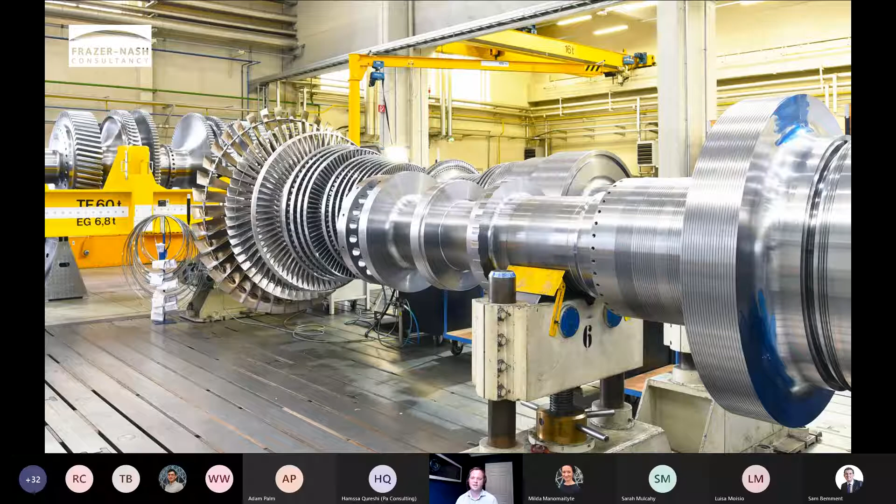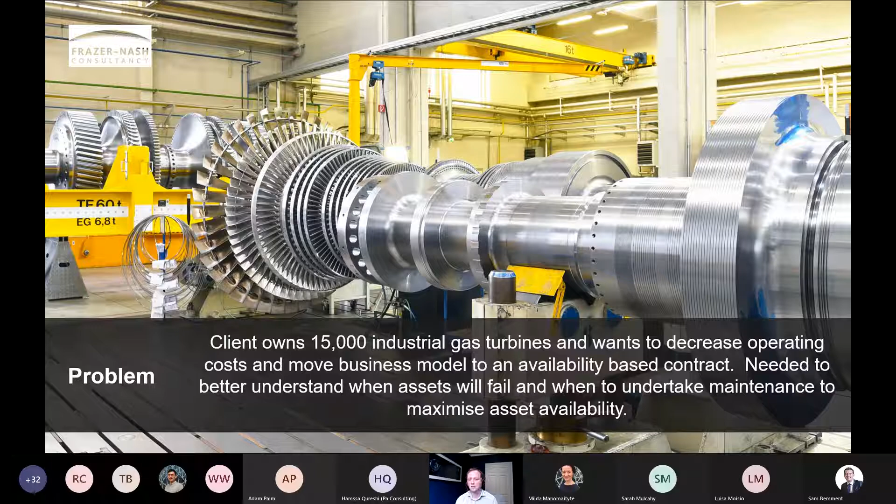And we have a particular client of ours who I'm not going to talk about specifically today due to confidentiality reasons, but they own 15,000 of these units around the world—big, heavy, complex pieces of machinery.

So it's a journey they've been going on for a few years, and Frazer Nash have done various bits and pieces that I'm going to talk to you about today. So where did all this start?

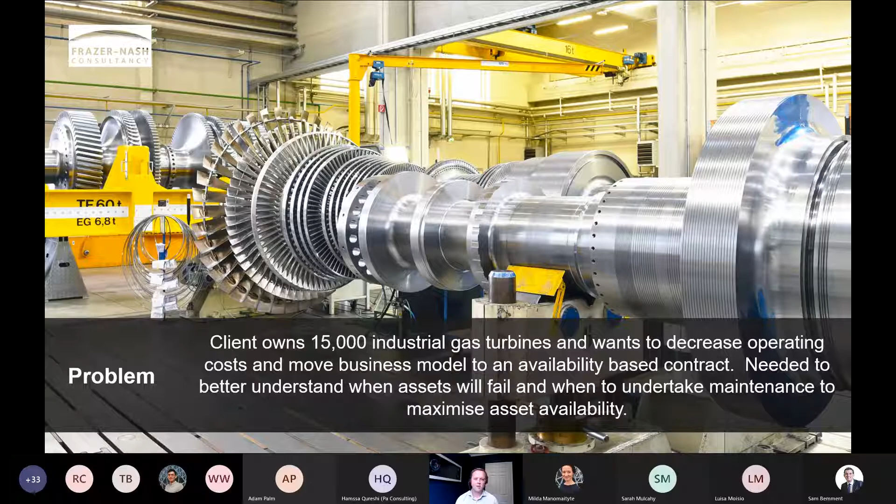So I'm going to talk about, as I just said, this is not about civil aerospace gas turbines. I'm actually going to use that as an example to start with.

When we think about condition-based lifing and condition-based maintenance, if we look at Rolls-Royce as a case study and their power by the hour approach, it's not new stuff - it's been around in industries and sectors for decades. The first power by the hour market approach from Rolls-Royce was way back in 1962, so we're talking 59, 60 years ago, where they took a Viper engine and sold it on an availability basis.

They retransformed their business in about 2002 when they launched the TotalCare package, which was the first time that the kind of data and instrumentation was able to play a really key role in condition-based life estimation and thus condition-based maintenance.

So you look at a modern Rolls-Royce jet engine these days, one of these two big lumps on the wings, and it's got hundreds and thousands of sensors across it.

It's a program they've been on for a number of years, and they've got real-time data being transmitted from all their engines around the world back to a monitoring system centrally, which does some onboard and offboard processing that allows them to have the confidence that they understand what their assets are doing, and thus have great confidence in when they need to be maintained and interventions need to take place.

But regardless of the asset in question, the fundamental approach here starts with the asset. So it could be a railway locomotive, it could be a box wagon being towed behind a freight train, it could be a civil aerospace engine, it could be an industrial gas turbine.

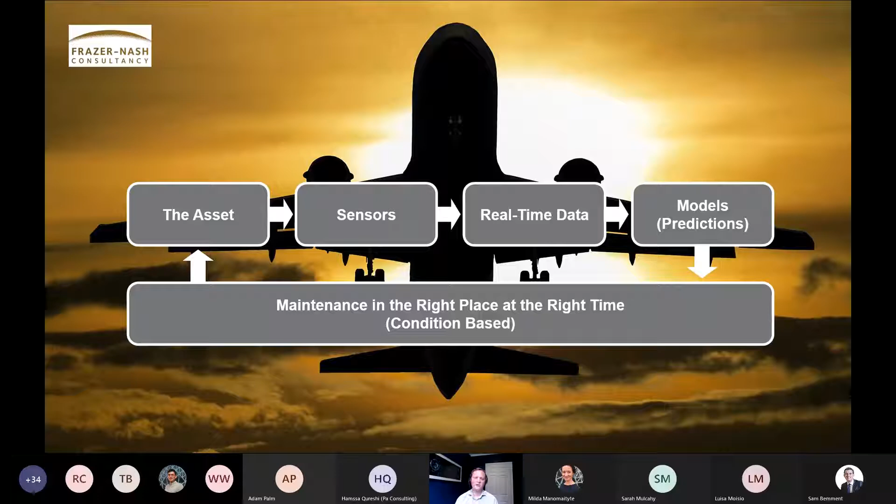All of that stuff doesn't come for free, and this is often the bit that puts people off from that first step on the ladder of condition-based maintenance. You either need some kind of very forward-focused strategic direction board down to make the investments, or you start small and do some sensible stuff.

And hopefully I'm going to explain over the next few slides about how starting small can really benefit people. But fundamentally, you need some information, you need some data, and you need to spend some time doing the engineering understanding of what's going on.

So digitization is key, it's crucial, it's critical, whatever word you want to insert there. Data and information about what an asset is doing is very important. But uncertainty about that data is also an allowable concept - we don't need precise, accurate estimations of everything all the time, and I'm going to cover that in a couple of slides' time.

So we see lots of digitalization. COVID's escalated the kind of digitization journey of quite a few organizations where everyone's been forced into the 21st century. We've got quite a few customers historically who haven't been in that kind of space, but now are, because the hand has been forced.

When we think about assets and data for digitization, there's two schools of thought. The first one, and probably the most common, is the big data approach. This is putting instrumentation on lots and lots of things, having lots of instruments recording lots of things all at once, getting readout of GPS location 20 times a second and storing that.

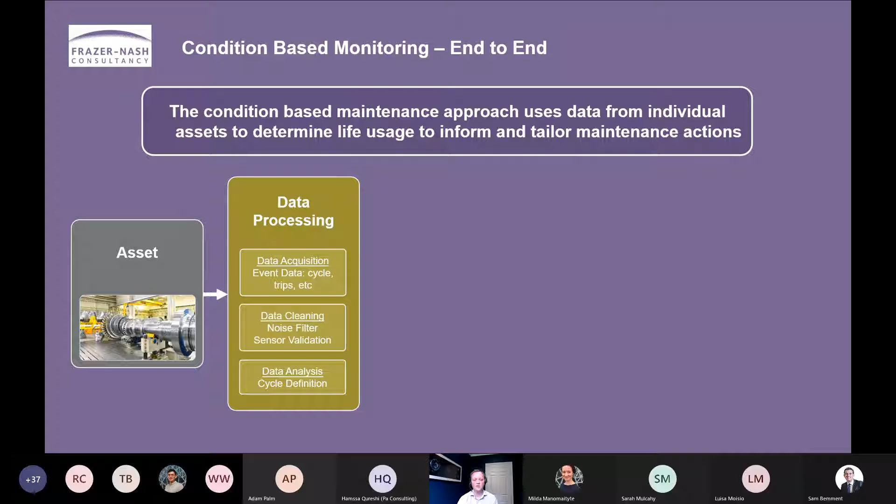And then we need to analyze that data, chop it up into the bits that we want to feed into our predictive life models. So we've got some data processing stuff going on.

In the case of a gas turbine, the bits that really cause us pain are that these things operate at internal temperatures of thousands of degrees. Very, very significant creep and fatigue problems occur in a very complex piece of engineering design. But fundamentally, we need to be able to model that in a way that we can take our data in real time and feed it into our reduced order models.

So our models of component stress and temperatures - what's going on within this particular example - we need to figure out what those models look like and build them. Once we've built those models, we can use them as the predictive engine to give us our life estimations. So this is where we've done complex models, simplified them, validated them using operational data, and we're now in the world of doing real-time estimates of life.

As I said before, the key failure mechanisms in this particular example are creep and fatigue, and indeed creep fatigue is a slightly different effect. But we have built the models to do the life prediction.

Every time someone changes what they're doing with their asset on the left-hand side - so they may be using it a bit harder, ramping up because there's a particular need for energy in this part of the world today - so we've ramped up how much we're using our gas turbine. That gets fed through the data into the models, into the life assessments, and in real time, as an owner of this particular asset who is now leasing it on an availability basis, we get the information we need to take action in the most appropriate way.

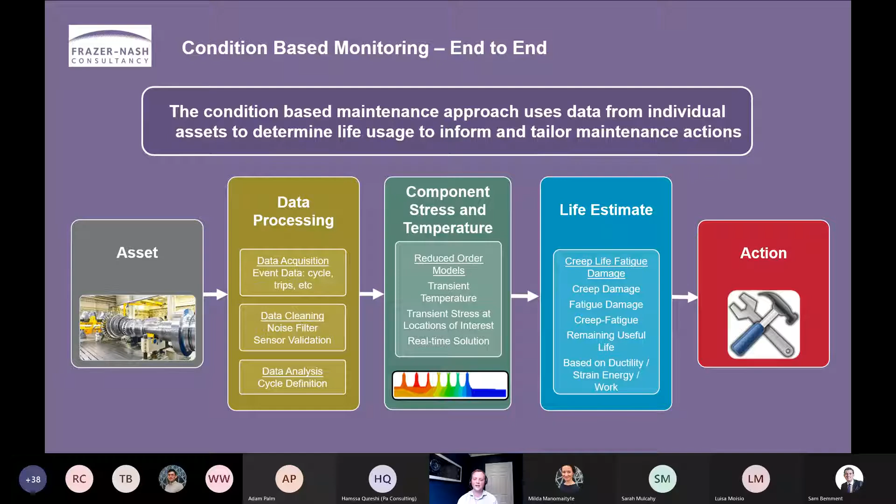So why are we going to do it? Why are we doing this stuff? Well, fundamentally, it's about damage. What we're talking about with condition-based maintenance, condition-based lifing, is we're causing detrimental effect to an asset, whatever it might be - gas turbine, railway carriages, etc. But what are we causing that damage relative to? Well, traditional maintenance cycles are based on number of hours, number of years, whatever it might be, between maintenance periods.

The way we get to those periods of, let's say, 20,000 hours of operation is that we look at what it was designed to do, we look at how that design point is likely to be seen in service, and we make a plan to maintain it around that. But it's conservative. It has to be conservative by its nature.

What we do when we're looking at actual usage is you start to see things are less damaging. Nobody's really using an asset as hard and as fast and as long as they are designed to be used. And that presents an opportunity for us to do more with our maintenance windows.

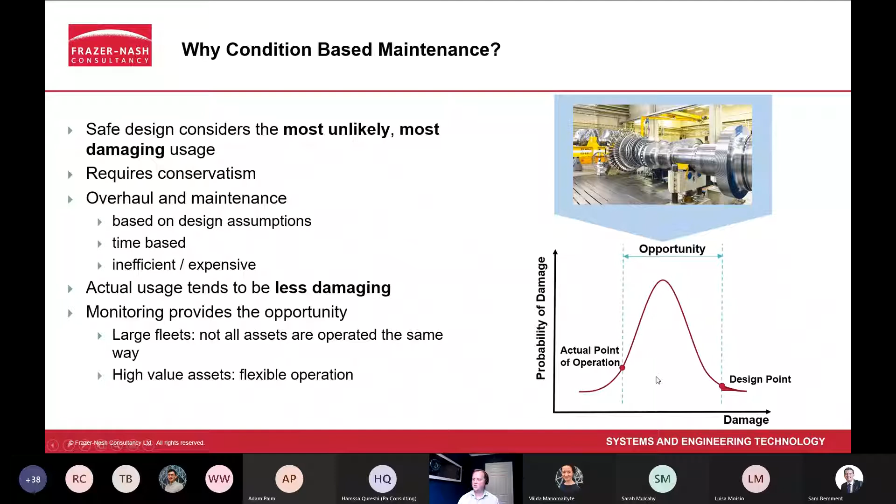It gives us an opportunity with uncertainty to understand what we need to do to that asset to maximize its usage. Condition-based maintenance and lifing is about quantitatively finding out what that opportunity looks like, how big is that bound we see there on the graph, and crucially, using the predictive lifing models, exactly what we need to do now to make sure that we never tip ourselves over the damage point where we're going to be causing significant damage and things fail. That for me is what CBM is all about.

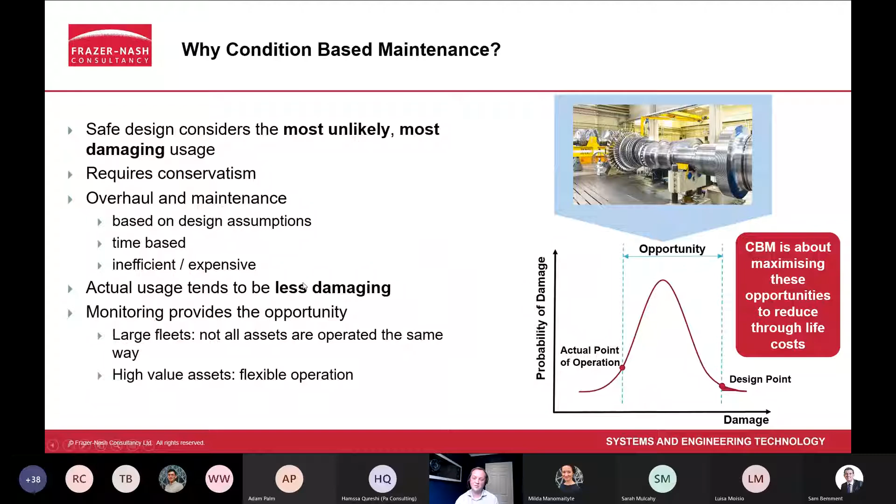And that's where the opportunity lies. It's about using and understanding lifing of, in this particular case, the hot gas path through the middle of an industrial gas turbine, to allow us to exploit the maintenance windows to best effect.

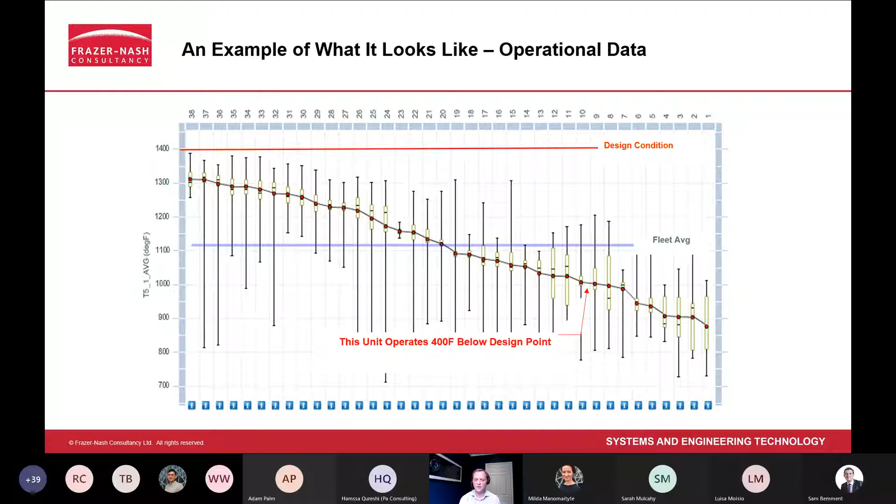The customer is nameless here, but they've got sensor data being recorded every hour and being sent back. It's feeding into real-time damage models so that they get the ability, in a dashboard view for all of their assets, to be able to see when they need to maintain things, and crucially, when things change, what they then need to do about it.

What are the benefits? Reduced cost of maintenance. For them, their spare holdings have reduced by 70%, and that is massive when you think about the number of units they're responsible for globally. They know when things are going to fail, they can predict when things are going to fail, and they can intervene before that point. So why have warehouses full of spare parts? You don't need to do it.

Cost savings here measured in the tens of millions of pounds, because you haven't got as many spares and you're not doing as much reactive maintenance, and fundamentally you're doing less maintenance, full stop.

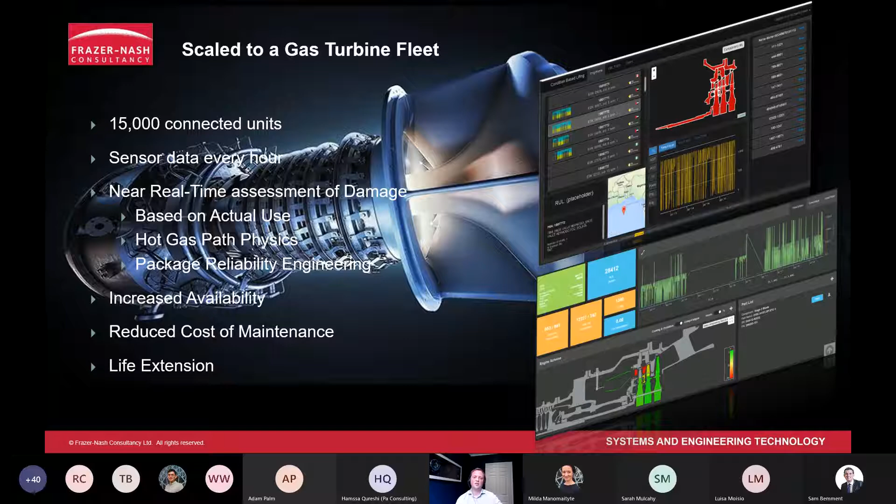And that's the kind of end result. They've been on this journey, they've invested in the process, and they understand the damage mechanisms. So that's all I want to share with you today.

Roughly just shy of 20 minutes there, I think. Quite happy to take any questions. I'll be around in the Q&A later, but if anyone's got any questions that we want to go into now, I'm not sure how much time we've got, Milda, but more than happy.

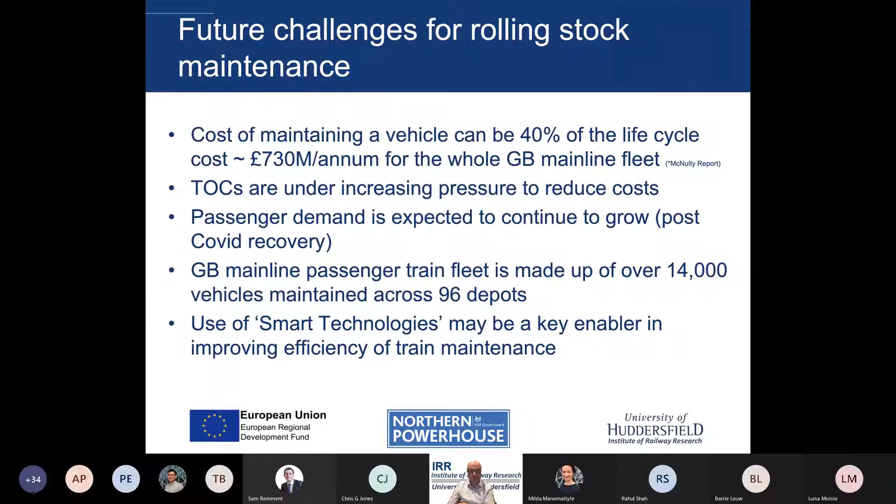The rail technical strategy and the key train requirements did identify the future requirements and focused on easy to maintain, and also safe and rapid inspection and repair. There's an increased emphasis on the use of RCM, also robotics and AI, including the better use of this - so infrastructure-based RCM, onboard RCM, such as intelligent diagnostic systems, but then intelligent analytical tools. So this is about taking the data and actually doing something with it.

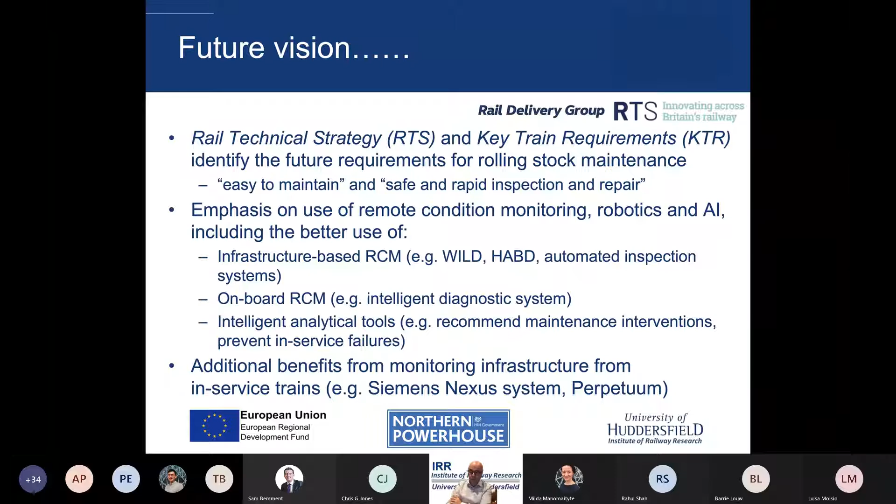And additional benefits from actually monitoring infrastructure on trains - something like the Siemens Nexus system, and a great example of an SME, Perpetuum, and the systems that they do. So picking up on the rail technical strategy, and honestly, Luisa and I's presentation wasn't produced by the same person at the same time, but we both got red squares and rectangles.

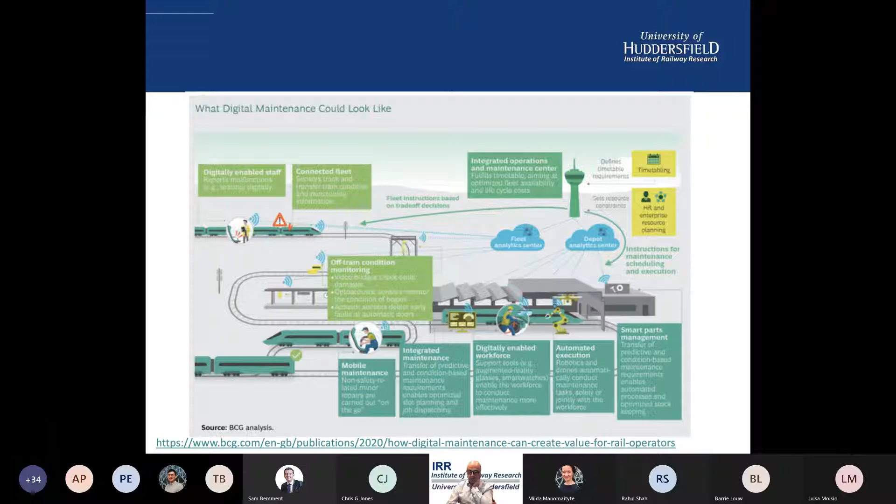Taking all that into account, I haven't really got time to talk through this slide in detail, but that's really a practical illustration of how we can take all of this data. That data can be analysed at both a fleet level and a depot level, and then actually deployed through things such as digitally enabled workforce, automated execution with robotics.

So we take all that into account and arrive at the Smart Rolling Stock Maintenance Research Facility based up at Huddersfield. It's a £1.8 million project to establish the facility, 50% funded from ERDF and 50% match funded. A 3-year project.

We are 9-10 months into it. The aim is to improve the efficiency and effectiveness of rolling stock maintenance to meet future challenges, and the facilities will include, as of September of this year, when all the construction and setup is complete, maintenance optimization and test facilities, a virtual depot digital twin setup, facilities to process RCM data and develop that data, and an augmented reality suite.

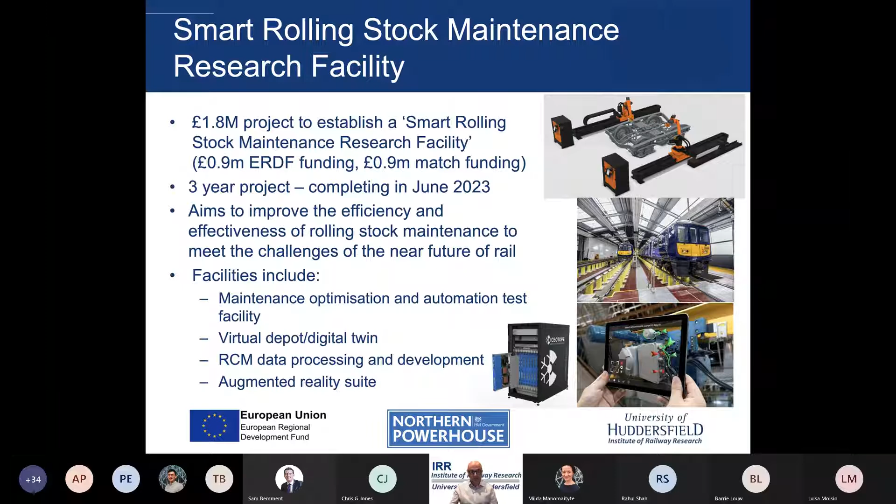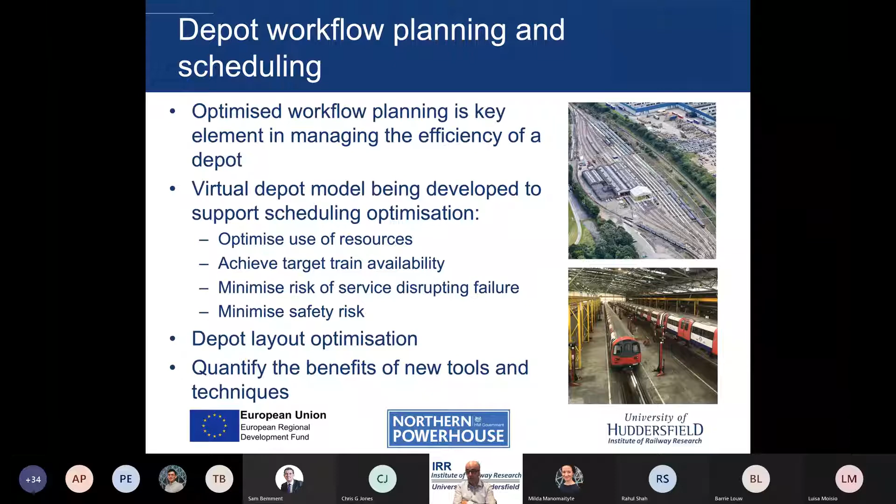So in terms of breaking that down into work streams, in terms of depot workflow planning and scheduling, with a view to that becoming virtual depot and a digital twin, we're going to be focusing on optimizing that workflow planning, because we see that as a key element in managing the efficiency of a depot - developing a virtual depot model to support that, looking at the optimal use of resources, helping to achieve train availability, minimizing service disruption, and of course not forgetting minimizing safety risk to the actual employees that work within a depot, looking at layout, and then also being able to quantify the benefits of new tools, new techniques, new machines, new equipment within a depot.

That is part of the model that we've started to prepare. You need to speak to somebody far cleverer than me to explain that in detail, but it's taking individual component level information and how that can then begin to feed through into condition-based monitoring, but also into how that fits into the depot activity and scheduling.

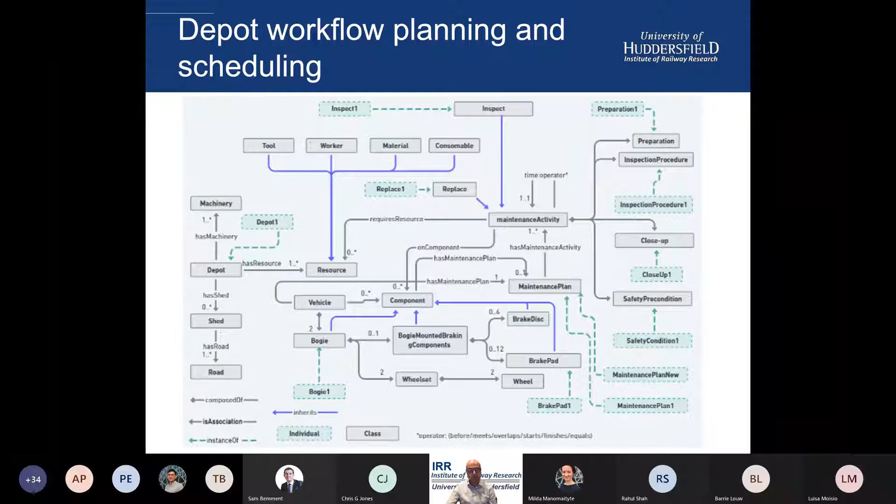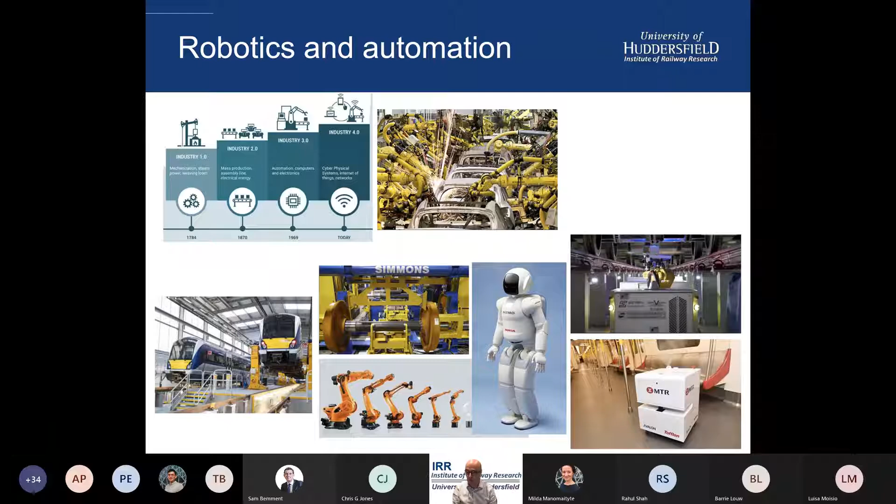Robotics and automation, very prevalent in a lot of industries, very much now part of Industry 4.0. We can see it in automotive, and we certainly see it becoming something that should be accepted and available in rail. There are a couple of images on the far right of actual robots in use, both under car inspection and in-car inspection.

Some of the tasks we're looking at for suitability for automation: inspection using image recognition, surface shape scanning, ultrasonics, torque checks on bolts, axle inspection, oil sampling. In terms of servicing: fueling, sanding, toilet emptying and water, cleaning, as demonstrated by that image earlier of the robot, also front end and under frame cleaning, and the replacement of parts using robots and automation, whether that be brake pads, filters, missing bolts, bearings, pantograph items.

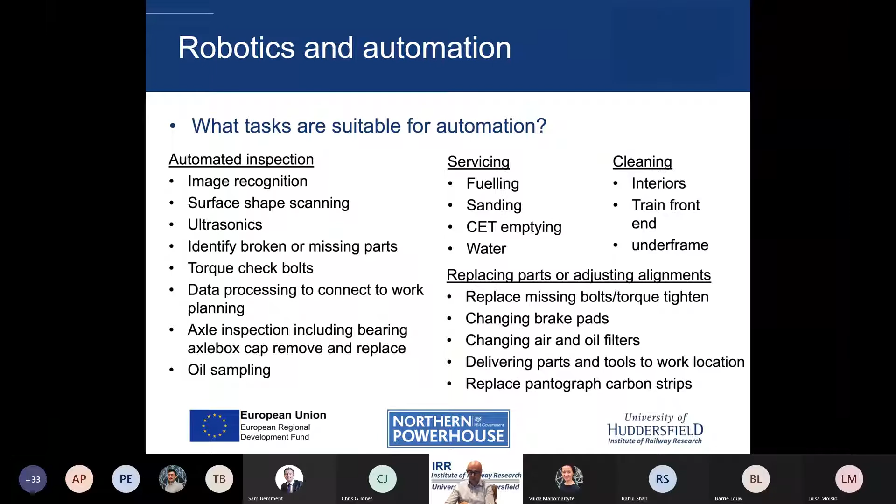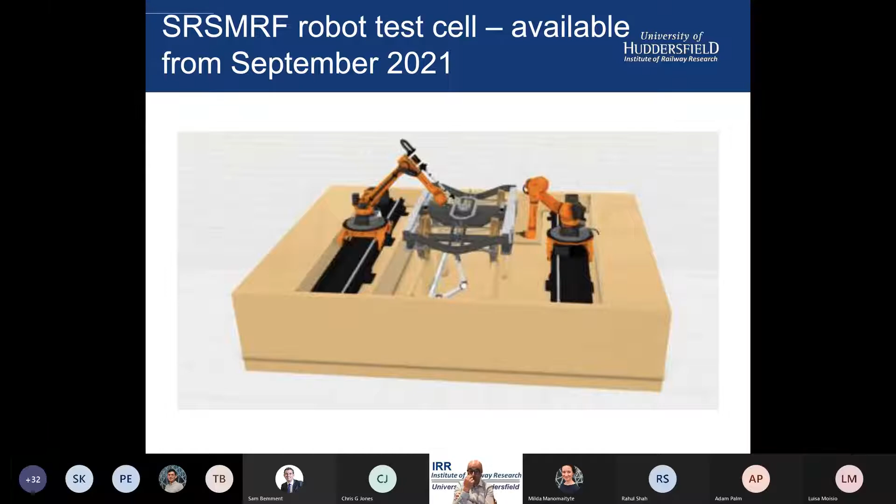What we're developing, which will be available from September of this year in the laboratories up at Huddersfield, is a small-scale rail maintenance pit, which will have two large KUKA robots either side. Apologies for the quality of this image. We'll also be able to replicate working on the roof by putting a cover over the top of the pit, and the robots can then work at roof height. You can see some smaller white robots in the midst in the middle, working on under chassis and component level stuff. At the moment, it's a big hole in the ground as construction continues.

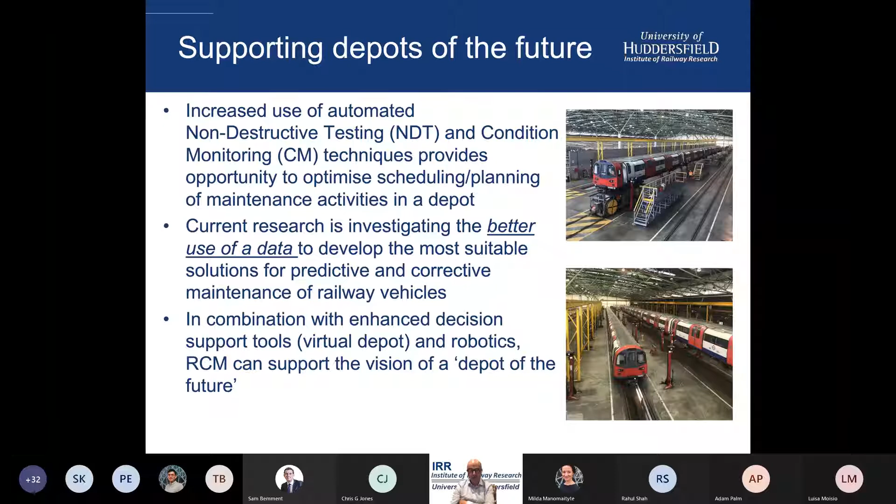Focusing a bit more on the data aspect, which from a prognostic point of view is the conversion of information into a digital form which can support future decisions. It's a key enabler. Previous research shows that RCM could provide up to 30% reduction in train delays, but there's a need for improvement in the effectiveness of the algorithms, which we are now working on, and also more sophisticated analysis.

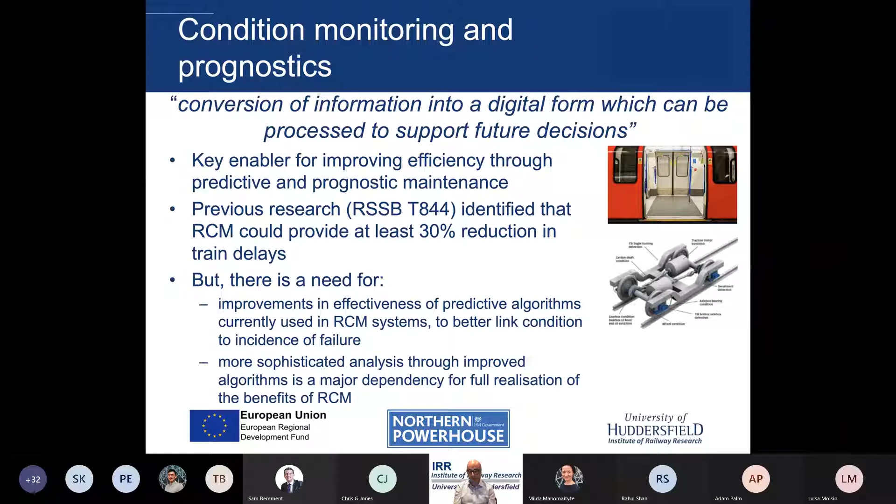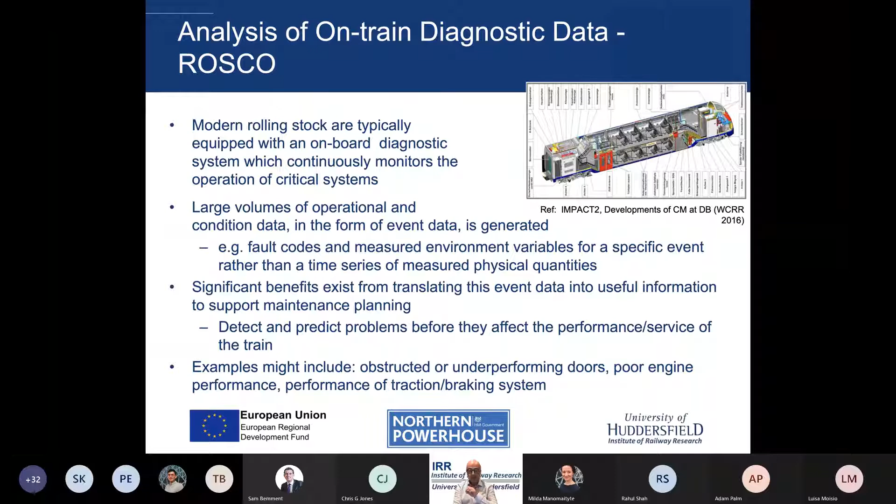So an example case study - this is a live project we're actually working on with a ROSCO, I'm not allowed to say who it is. The rolling stock we're analysing is equipped with onboard diagnostics that are constantly monitoring performance and outputting data - large volumes of operational and condition data, fault codes, environmental variables, etc. What we're drawing on is translating that data into useful information to support maintenance. So instead of it being 'this is what's happened', we're trying to detect and predict what that leads to in terms of a fault analysis process.

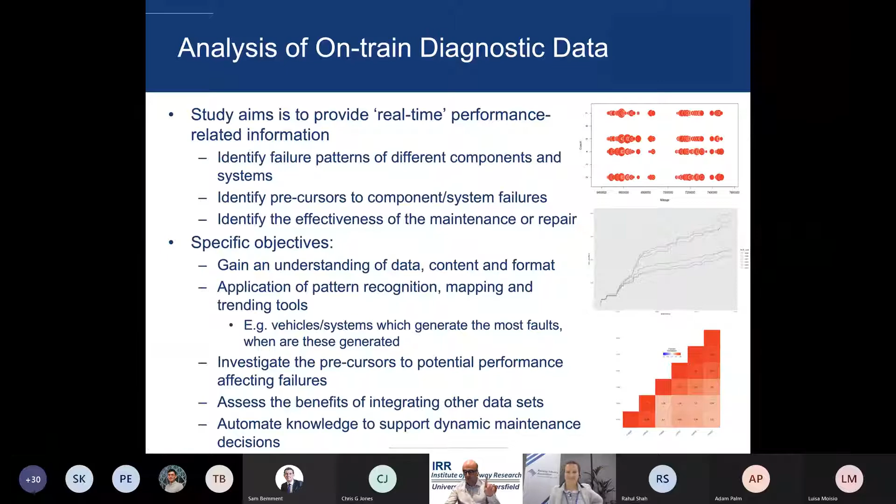We're aiming to provide real-time performance-related information. Some challenges: significant experience on robotics in manufacturing, but not so much in maintenance, some condition monitoring, schedule problems, and cross-industry data.

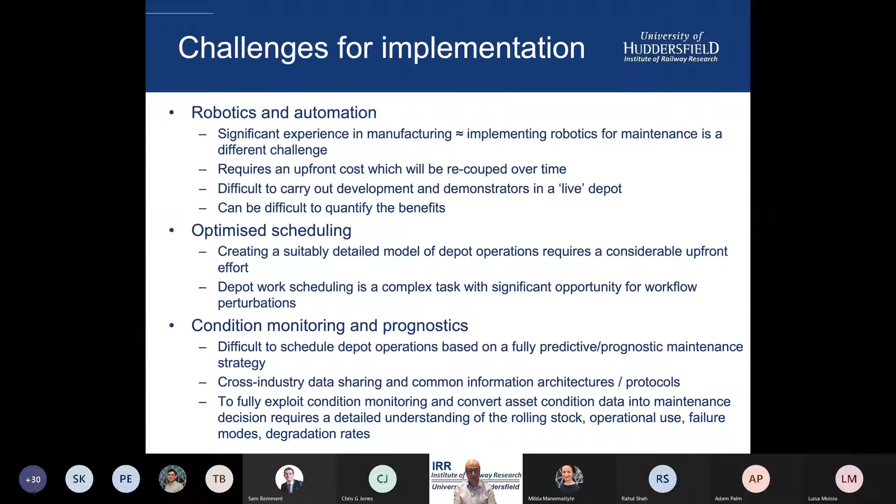How can you get involved quickly? We're looking for key challenges and opportunities for train maintenance depot operations, suggest some case studies to us that we can investigate collaboratively with our funded researchers, and assist the project by sharing data with maintenance records and assets. From a supplier point of view, we're looking for collaboration to demonstrate solutions. Someone asked for a skunk works - I hadn't thought of describing ourselves as that, but it sounds good. Looking at sensors and software, models and data management that you can bring to the project, and we can help you develop products or proof of use cases, again using the assistance of our funded researchers.